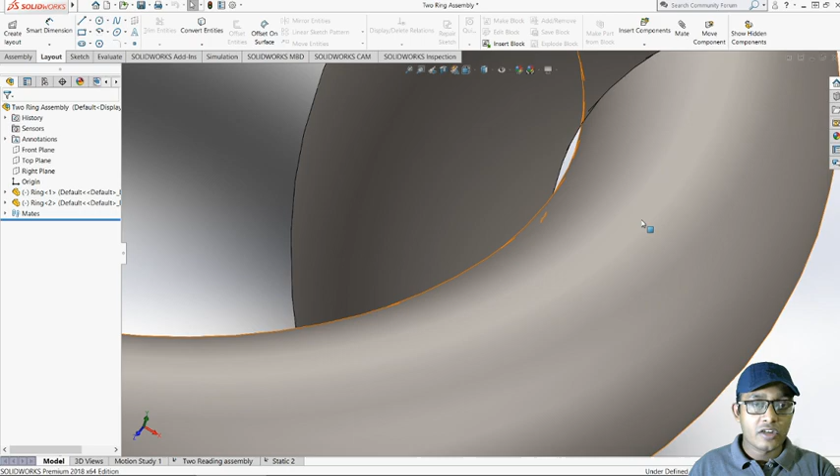Today we're going to learn how we can draw a two ring, and how we can assemble this two ring in this way, meaning inside each other. And the second thing we're going to learn: if we apply the external load on any side, keeping one side in static position, what kind of contact pressures will be generated in the contact places in this two ring. That means here what will be the conditions of the contact pressures in this area. So this will be our learning objectives of today's tutorial.

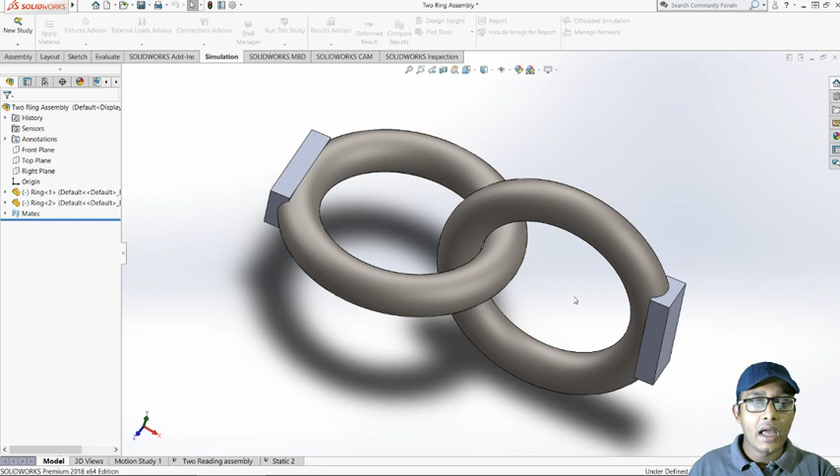So at first we'll learn how to draw this. We'll draw the part drawing first, then we'll assemble this ring, and then we'll run a simulation to demonstrate to you how we can measure the contact pressures in this area when external loading will be applied on any side of this two ring. So without further delay, let's get started.

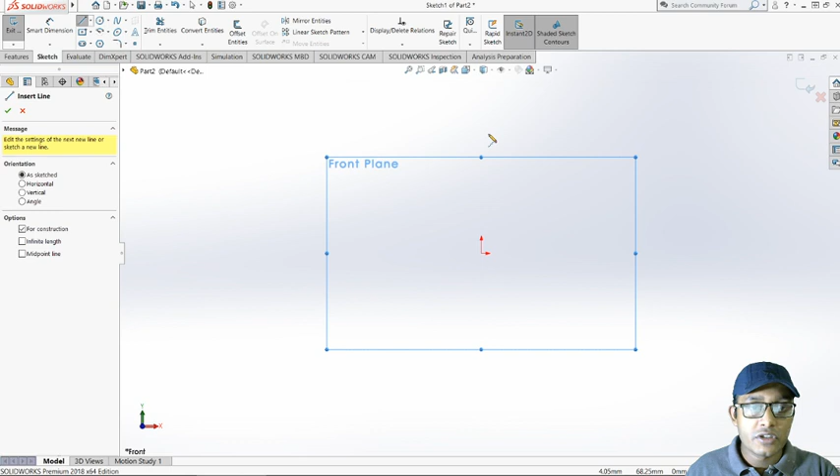So we'll start with the part drawing first. Our first task is to draw a ring. We can start from any of the planes, so let's start with the front plane. There is a couple of ways to draw a ring, but now I'm just showing you one. So I'm drawing a reference line first, then I'm drawing a circle.

Then I'm giving it smart dimensions: let's give this one as 20, and let's give the distance from the center line to here as 50.

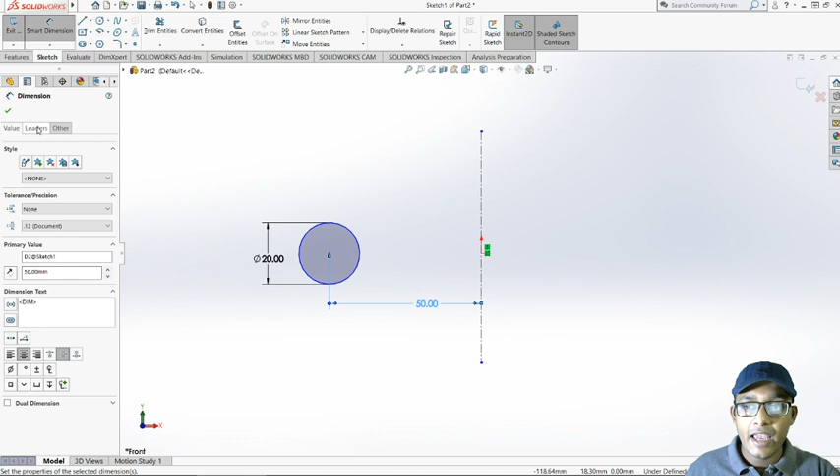Now what we need to do is go to Features and Revolved Boss/Base. If we just select this face, automatically it will take the axis of revolution here. This is our axis of revolution and this is our thing.

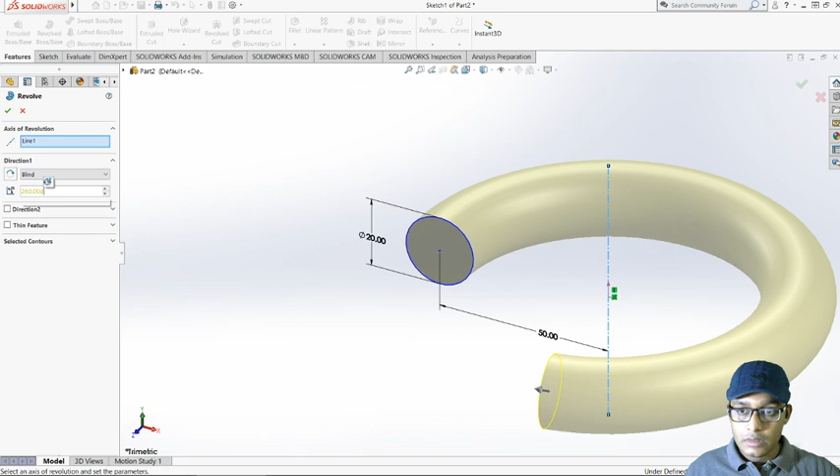So actually here the 360 degree is given, so we can also change the degree to 200 degrees, or we can also increase this one, but to make a ring it must be 360 degrees. So without further delay, let's put 360 degrees.

All right, so now we have a ring, but the problem with this ring is there is no flat surface where we can apply the load, and we cannot put any boundary conditions, because if we select on this ring, the whole ring will be selected. So that's our problem - we need to create a flat surface in this ring.

So let's do it. Let's select this right plane. There's a couple of ways to do it, but let me show you the easiest way. Actually, if you select the right plane, top plane, or front plane - any of these planes - it is exactly in the middle. That means if you draw anything, all the drawing will be on the middle plane. So that will not help us.

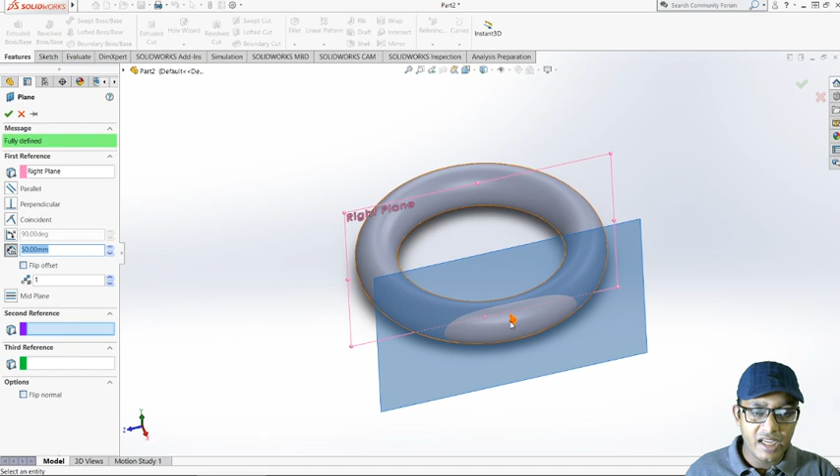It will not help us to remove or add material on the ring, whatever we draw here. So what we need is a reference plane. Let's select the right plane and select reference plane. So if we select a reference plane, you can select either side, and you need to put a distance from here.

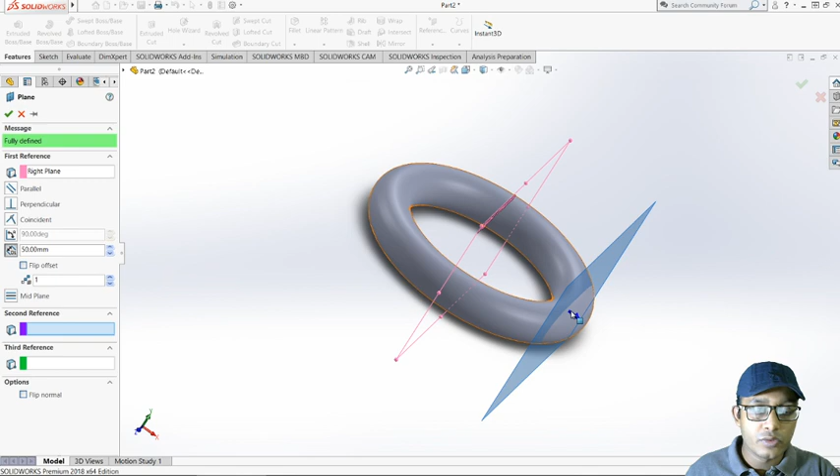You can reduce this to 40 or 30. 30 is not going to help us. 40, yes, somehow it will help us, but 50 is exactly in the middle of the ring, almost - as we selected from the center, the radius was 50, so let's keep this distance as 50. Done - now we have a reference plane here.

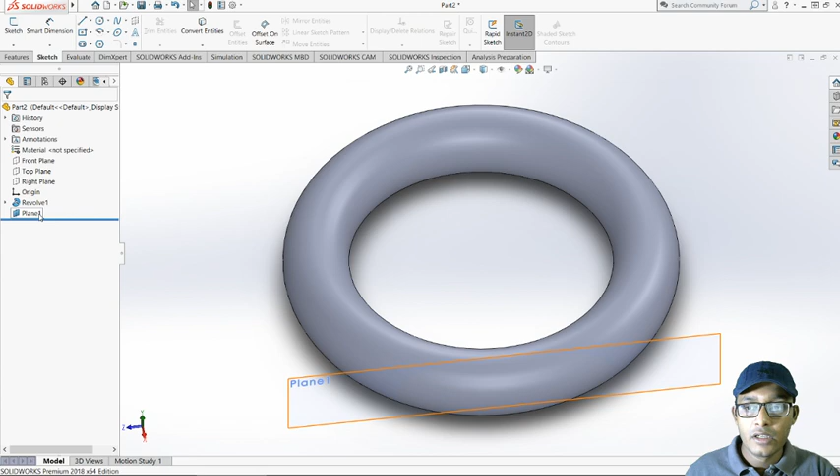Now we have a reference plane. So if we select this plane and draw anything here, it will be inside this, like here - it will be drawn here, right? So that's the thing that we want to do.

So let's select this plane. Now let's draw a center rectangle. Let's draw this, now let's give it dimensions. So let's give this dimension as 20. And this distance of 95 is too much - I think 70 is good enough for us. Let's give this one as 70.

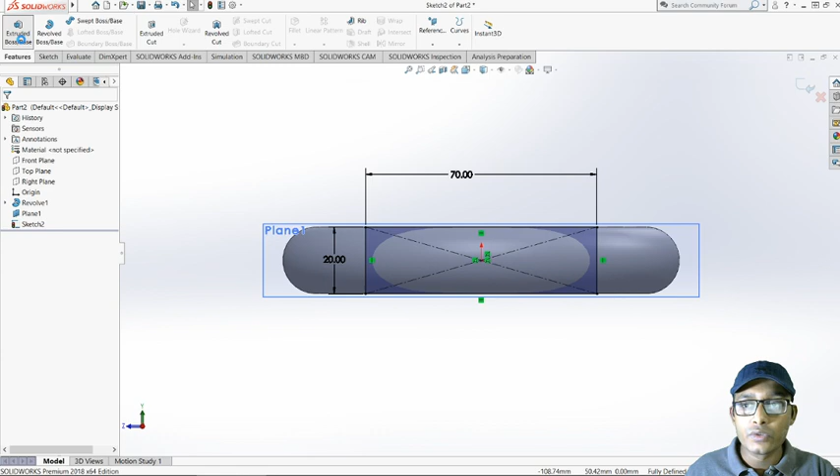So 70. Now if we use the Extrude Boss Base feature, as you can see from 50, if we select like this, giving 10 is good enough for us. If we give 10, we now have a flat face here, and it will help us in many ways in the assembly as well - we can select the face to mate with each other.

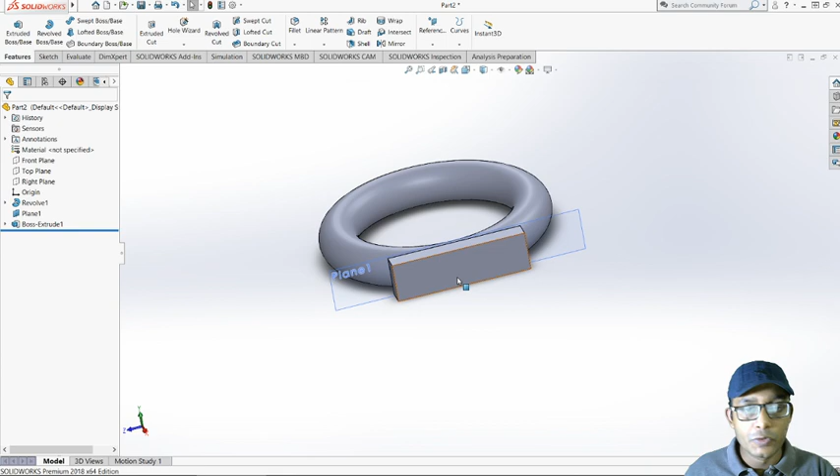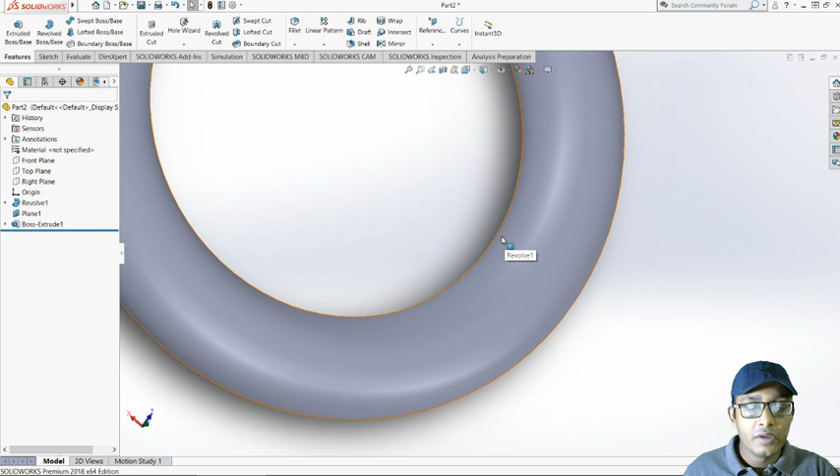So now one portion is done, but to fix the ring inside each other we need one more thing, because we can make the axis parallel with each other using this surface, but how can we mate these portions? Because if there is nothing, the whole ring will be selected.

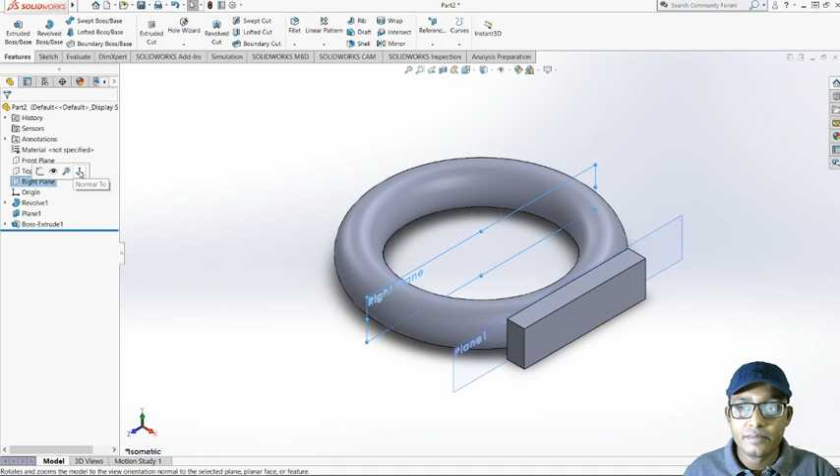So we need to create some point here so that we can select it in the assembly. All right, so for this, let me just show you. Let's select the right plane once again. Here now let's draw a very small circle. Very small. The radius I'm gonna give is 0.5, that is the diameter is 1, right?

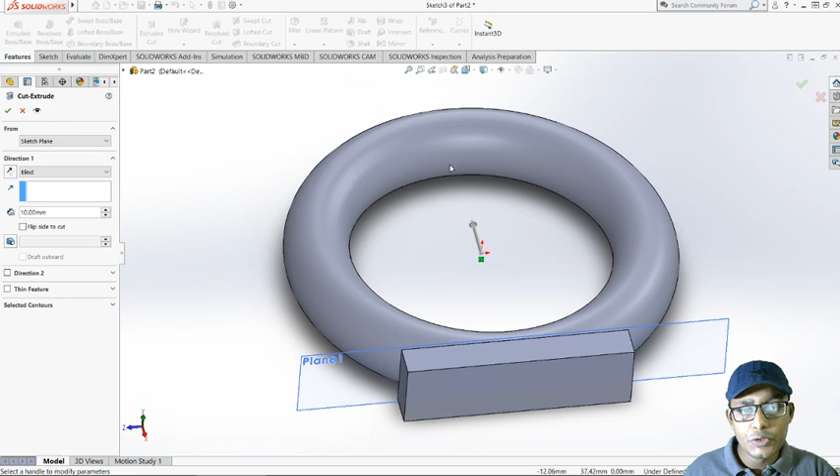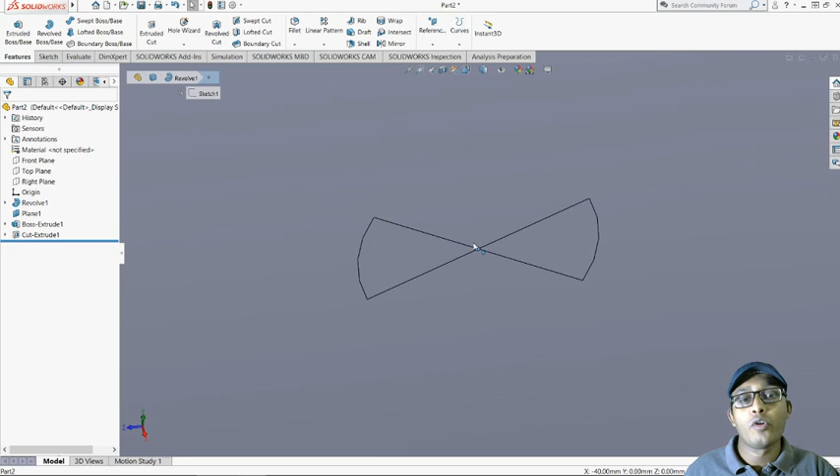So now I will use extrude cut. And if you remember, the distance from here to this surface, that means the inside of the ring, was 50 minus 10, that will give us 40, right? So if we select 40 and make extrude cut, it will just touch the surface, and we are going to get a point here. This point will help us in the assembly sections.

All right, so can you see this point? I think yes you can. Just let me check it's running. Yes, the video is running. All right.

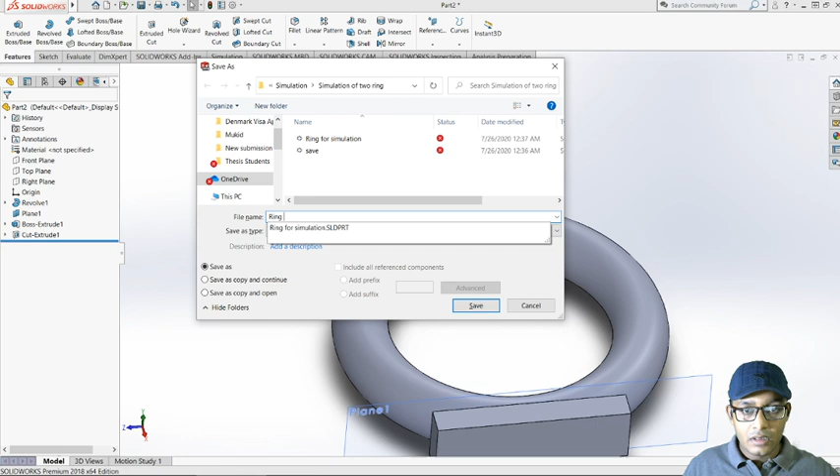So yes, our part drawing is done. So now let's save it. Two ring simulations, ring 1, let's give this name. Now our part drawing is done. Now let's go to the assembly sections. So let's select assembly. We have just drawn this, ring 1. We need actually another ring, right? So let's select another ring.

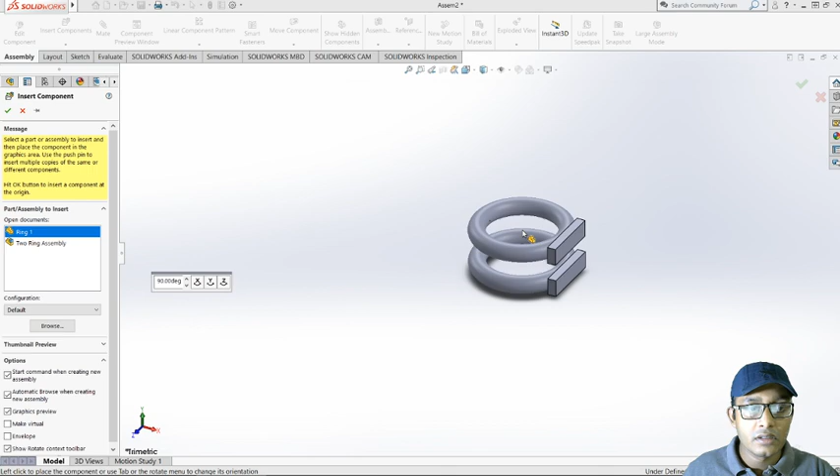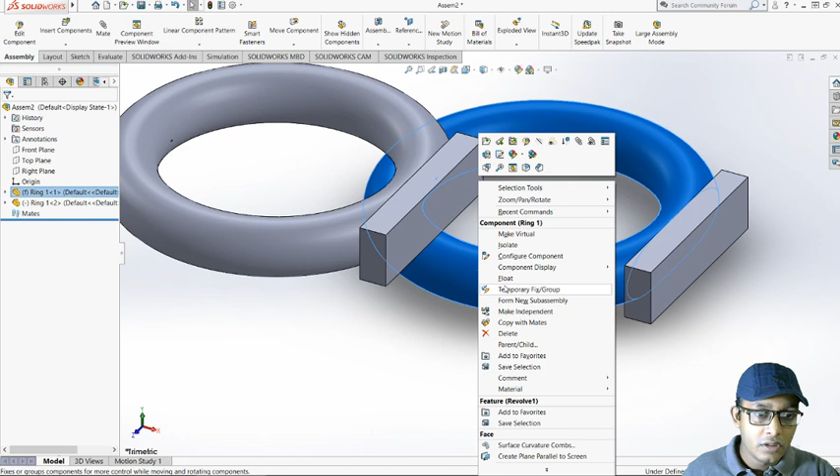So now what do we want here? We want to insert these rings inside each other, right? You can move this one. To make float you can move both of them by using floating options, or you can fix this one. So let's make this fixed, now this is float. Which one is floating and which one is fixed, you can identify here. This F means fixed, and this minus means you can move this one around.

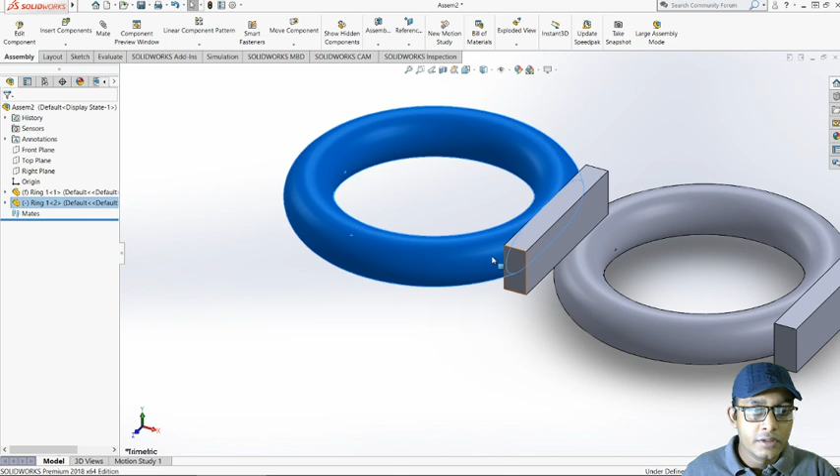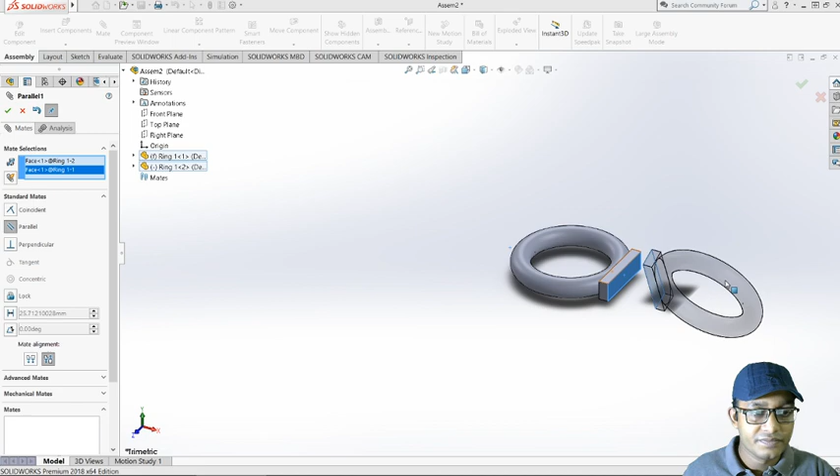So what we'll be doing first, let me show you. We'll mate the faces, right? So let's select this face and this face. Let's select parallel, but as you can see, we will select it this way, parallel but in the opposite way. So if you select it, now we can move this one in this way. Also we can select this face and this face as parallel.

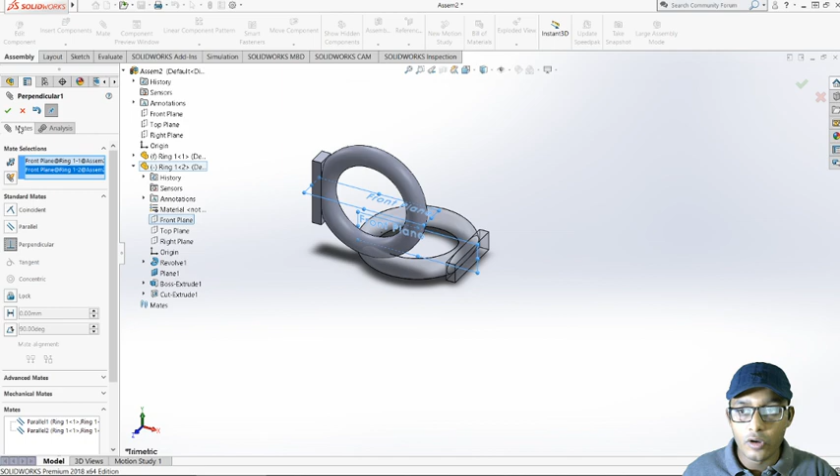Now, there is another way to do it as well. We can select this front plane for the fixed ring, and also select this front plane, and select perpendicular to each other, which will also serve our purpose. Yes, now it's fully defined.

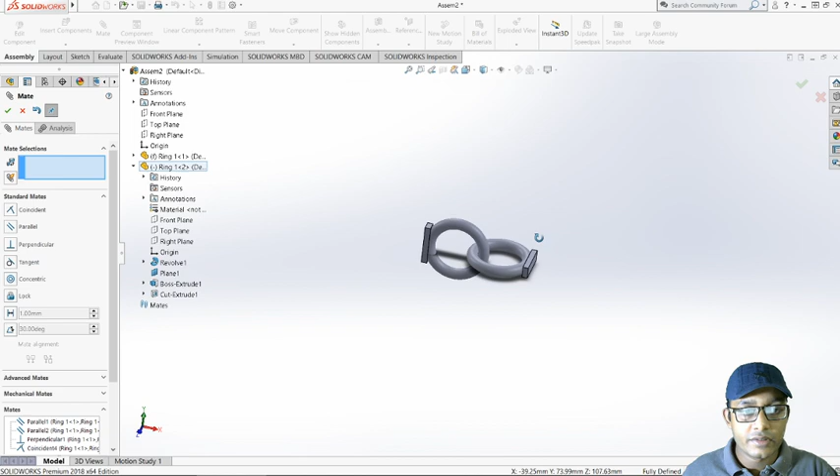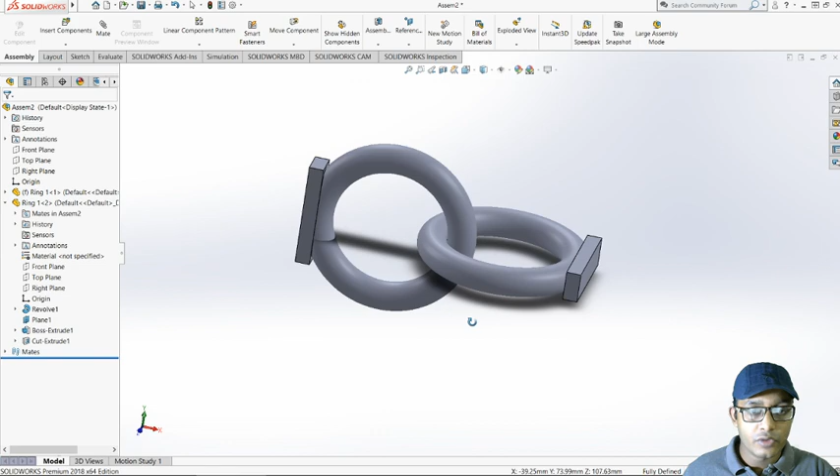Now we'll select this point here, and we'll also select this point here. Now coincident. If you do this, our task is done. Yes, now it's fully defined. As you can see, now we have a two ring assembly, inside each other, and we are ready for our next step, that is the simulations. I don't think it's very difficult, it's easy to perform. So if you understand from here, now we are ready to move to the next section.

If you don't have simulations in this ribbon, you can click on the SolidWorks add-in. Then here you will find SolidWorks Simulation. If you click here, then simulation will come here. So after simulations, select new study, ring assembly. Let's give this name: contact pressures of two ring.

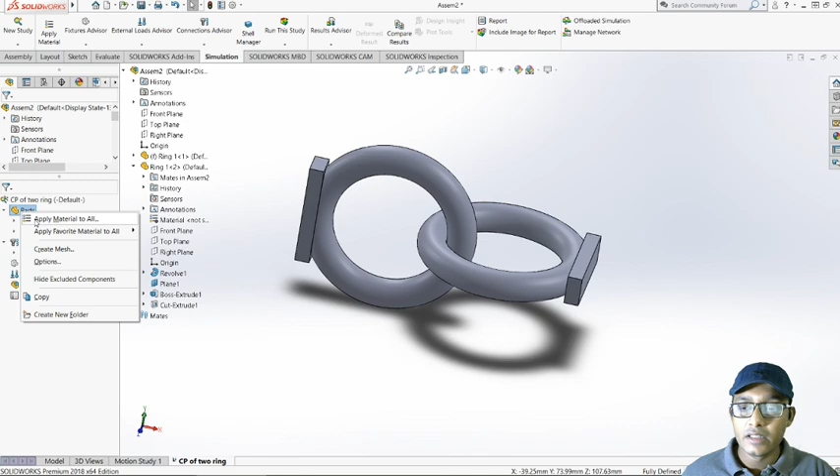The first task is to define the material property, what material you are going to use. You can give different kinds of material for different parts, but as we are using the same material in the two rings, we can right click here, then click on apply material to all. Then we can select AISI 1010 steel, hot rolled bar. If we now apply, you will see that AISI 1010 steel hot rolled bar is selected for both, and the color is also changed accordingly. So this is our first task.

Now the second task: after doing this, you see connections. In the connections, if you click here, you will see global contact bonded. It's bonded by default, but it's not bonded actually. You need to select the contact type, no penetration.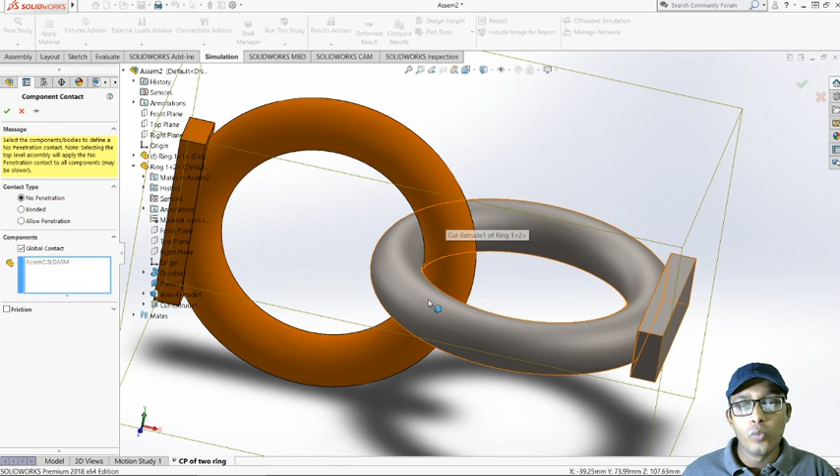All right, so why no penetrations? Our expectation is when the load will be applied here, this ring, as it's made of steel, is definitely not going to penetrate inside each other. It's not bonded as well, and we don't want to allow penetrations here.

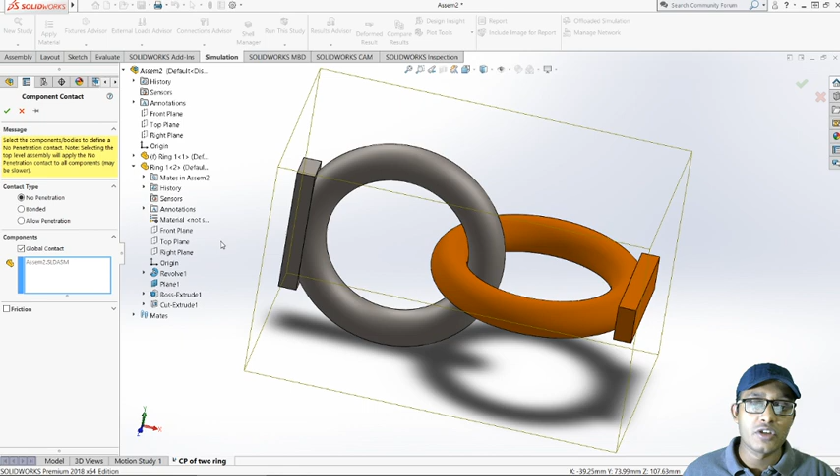Where can you use bonded? In composite material, where one layer is attached to another layer with some kind of chemical adhesion. At that time you need to use bonded. And when can you allow penetrations? If you are working with rubber type materials where some sort of penetration or shock absorption is allowed, at that time you can allow penetrations. All right, so we have selected no penetration for our simulations.

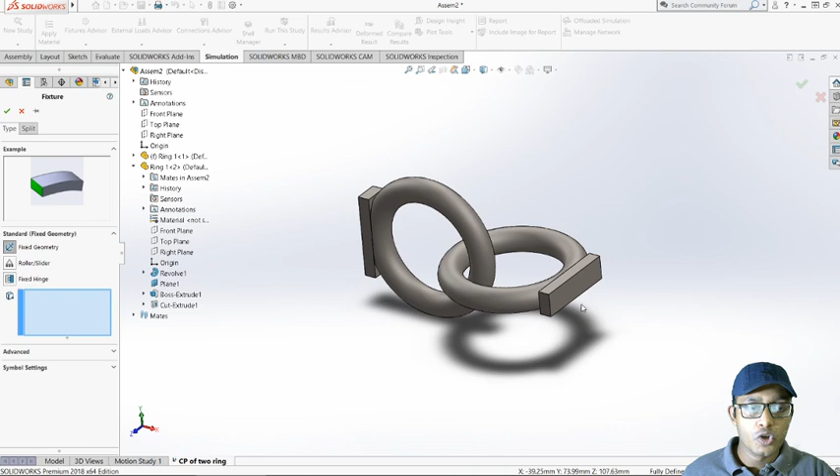Now we have to select fixtures. In the fixtures, you need to select the fixed geometry. When you apply the force, the other end definitely needs to be fixed, so that's why fixed geometry is important. For fixed geometry, let's select this face.

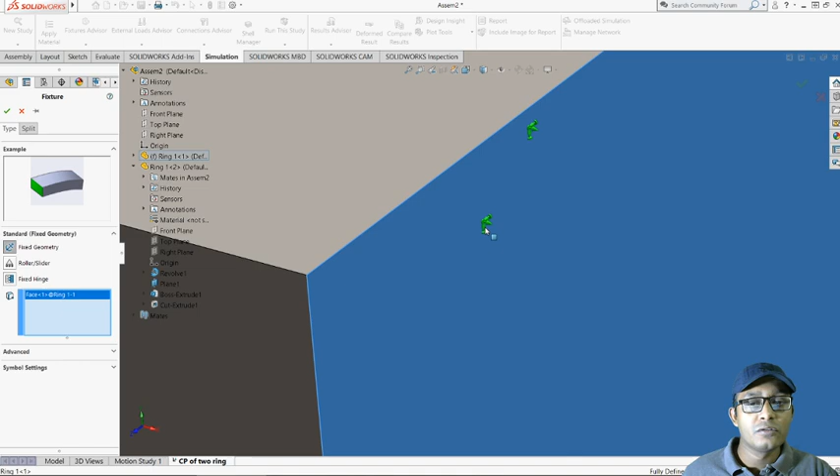If you select some face, this kind of three direction arrowhead will be applied. What does it mean? This green arrowhead is showing the XYZ directions. If it is green, there will be no displacement in these three directions, and it is completely fixed. Remember this one. This is our fixed geometry.

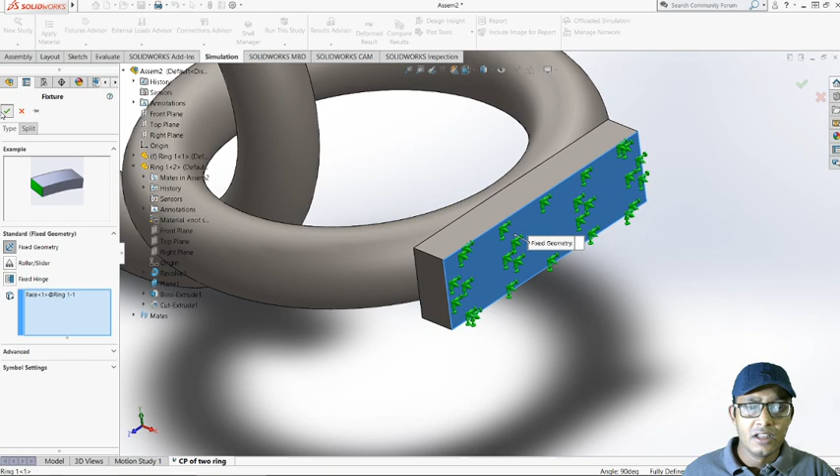So you can select this face as our fixed geometry. I think you can select all the faces actually, but it will not make any difference, because if this face is fixed, the other face is automatically fixed as well. So we have selected this face as our fixed geometry, and we'll be applying load here, in this face. Now there are a couple more boundary conditions we need to give.

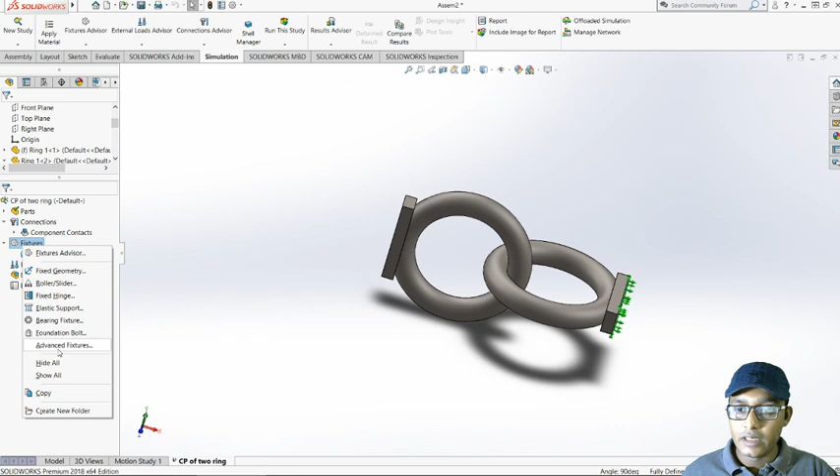For that we need to right click on the fixtures, then advanced fixtures. In the advanced fixtures, we need to select this face where we'll be applying the load, and which direction it will translate, meaning move. It is in this direction, front. When we apply the force, it will move this way. So now we need to restrict the movement in the other two directions.

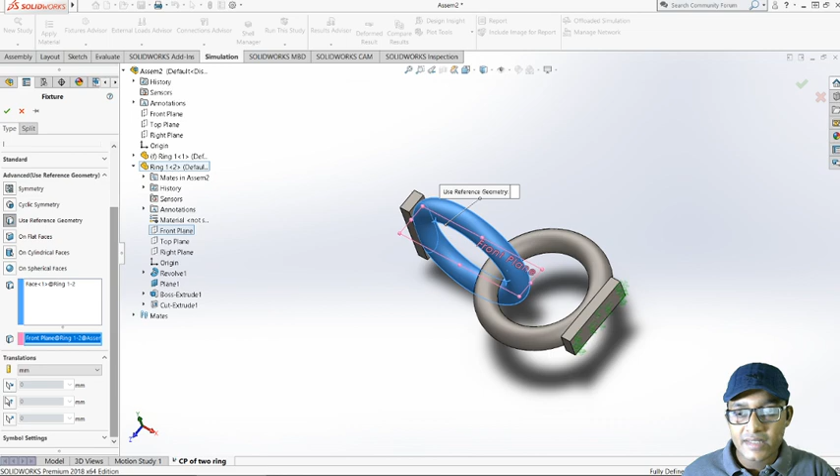How can we do this? If we select here, you will see there is an arrowhead. We want the displacement in this direction to be 0. In this direction, as you see from the arrowhead, we don't want any kind of movement.

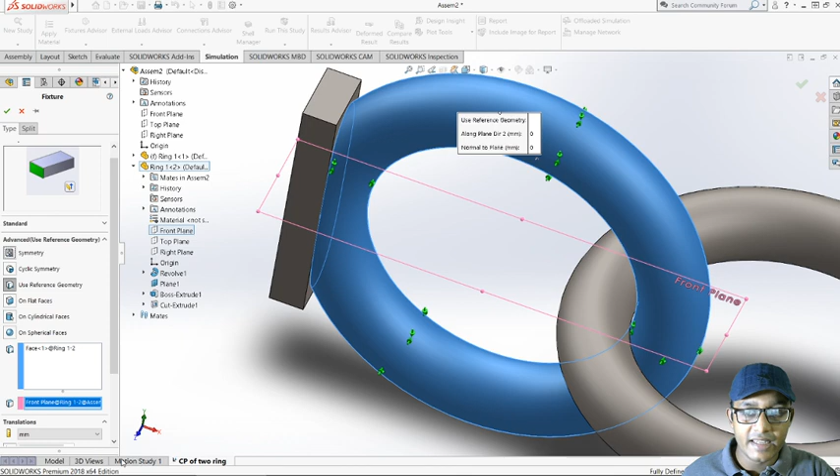Now again let's select here. Yes, it is again in these directions. This is X, this is Y, this is Z. So in the Y and Z directions, as you can see here, I have restricted the movement. The value is 0. I just want displacement in the X direction, so keep X this way. All right, so we are done up to here.

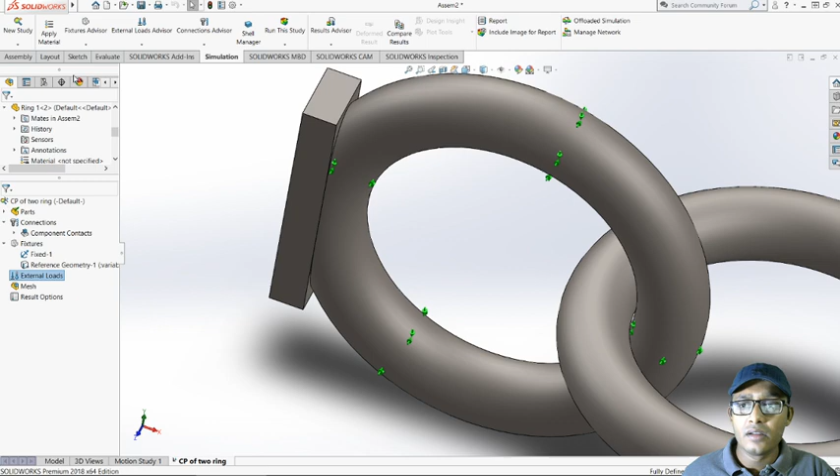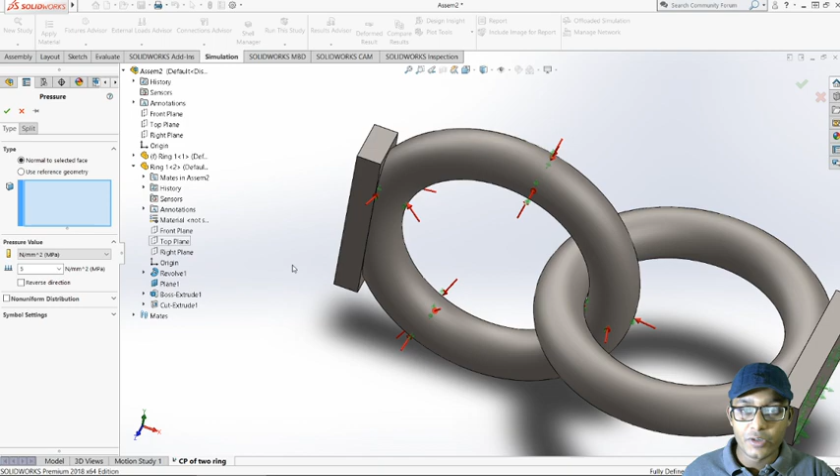Now let's give an external load in terms of pressure. We'll be applying pressure loading in Newton per meter square, megapascal. Let's select this one, Newton per meter square, megapascals. Let's give a load of 5 megapascal. But where do we need to give the 5 megapascal?

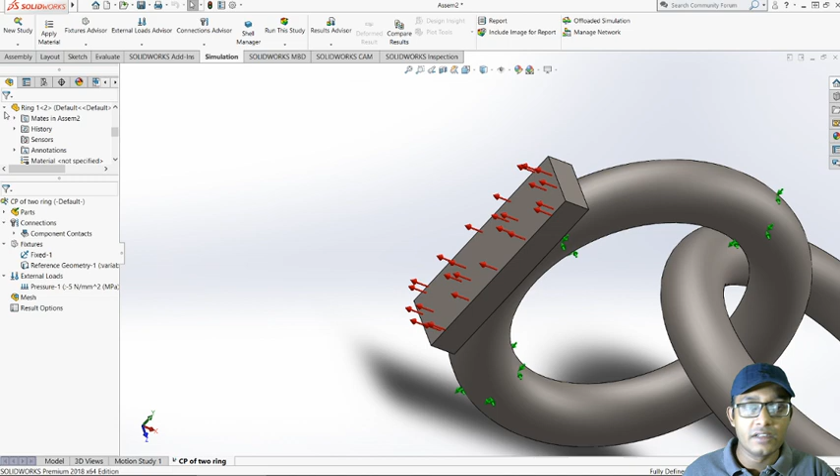Here in this face, right? But you can see the arrowhead points this way. If we give a load this way, it's not going to help us. So you can select reverse direction so that the force is applied in the right direction. Done. So we are done with the necessary conditions. Our next step is to create the mesh.

Actually, creating the mesh is a very important step of simulations. Now I will be showing some tips and tricks to do a fine mesh. The finer your mesh is, the more time it's going to take. If your mesh is coarse, meaning a bigger size, then it's going to take less time to finish the simulations. So let's select apply mesh control.

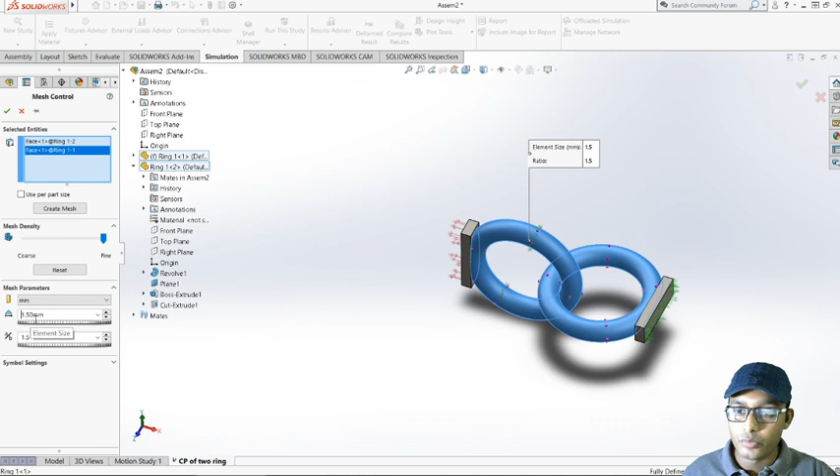Now let's select this face and this face. In this area, I want very fine mesh. If I want fine mesh like this, you can also put your own value. If I put 1.5, I can set the minimum mesh parameter to 1.5 millimeters. And I can select here this way. Now I need to go to the create mesh portion.

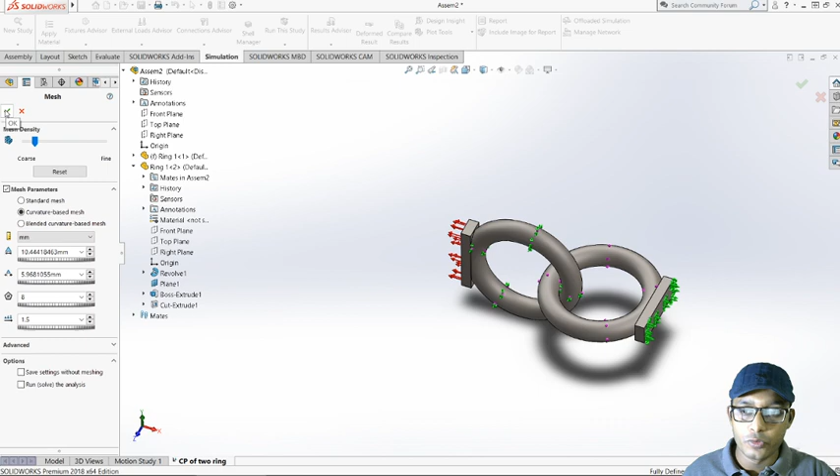Now there is standard mesh and there is curvature based mesh. This is a curvature based mesh, and we need to select curvature based mesh. If we select curvature based mesh and I select coarse, let me show you what will happen. And then if I select like this, let me just show you what will happen.

Yes, it's done. As you can see, as we have selected curvature based mesh in these two rings, that's why you can see that in this curvature the mesh is very fine, but in this area the mesh size is coarse, that means a bigger size.

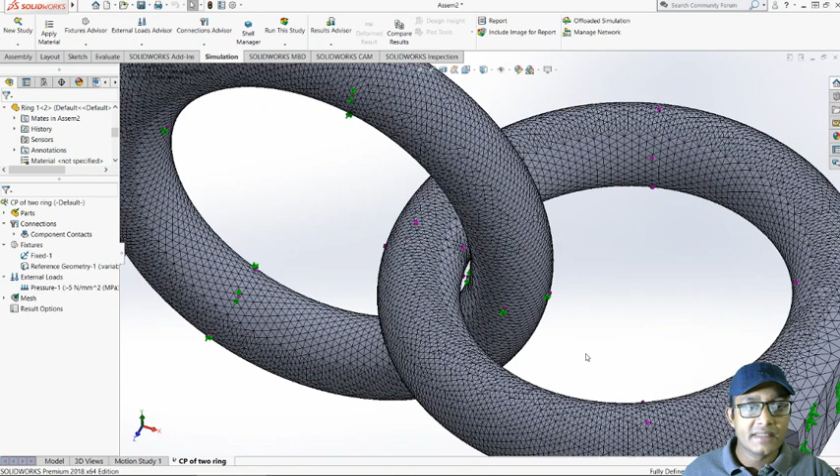Okay, so because our interest is in this area, you can draw it in such a way that we can make partitions here, and we can select this face and this face, and we can put these two areas as a very fine mesh and other areas as coarse mesh, which will help us effectively reduce the computational time.

All right, so we are almost done with the necessary arrangement for the simulations. Now what we need to do is run the study. Let's click run this study. It's going to take some time, as you know, we have given a very fine mesh, so it's going to take some time. So let the simulation complete.

Actually, I think we need to wait for a lot of time. So let me cancel this solver, because it's going to take some time. So let me just show you some other way to create the mesh. Here we can select not fine, coarse mesh. Okay, let me select this one, and let me show you mesh progress.

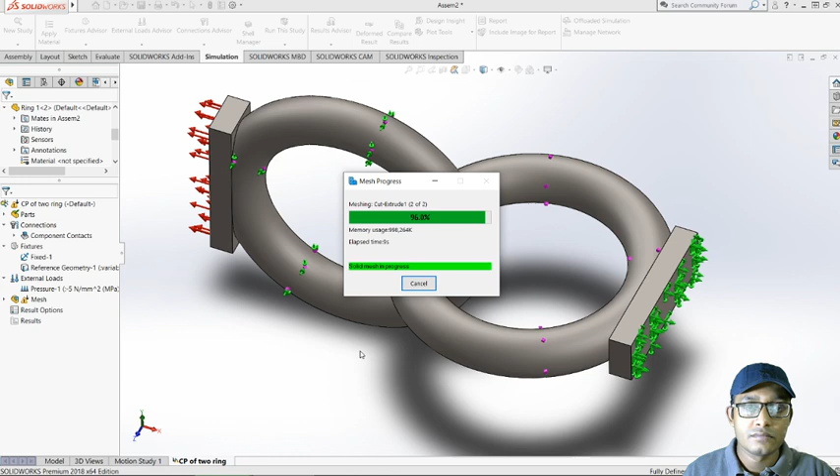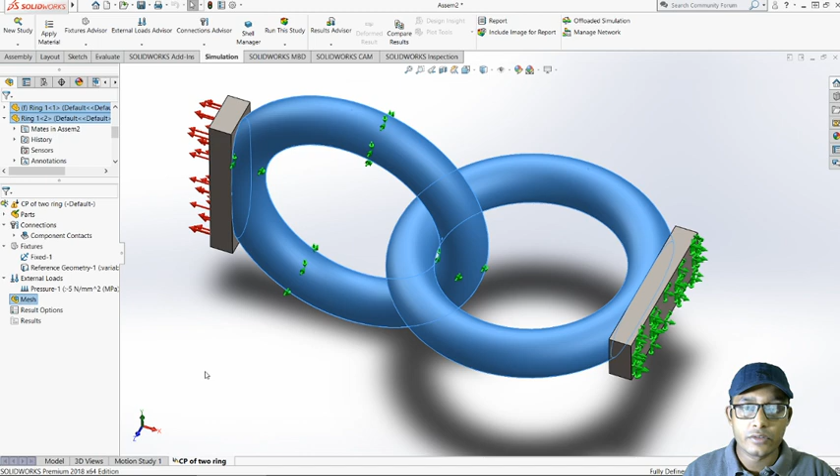I think something is wrong with the control. Let me delete this. Actually, it's already saved. Let me delete this one as well. Okay, let's do it once again. Let me show you. So here, apply mesh control. Let's select this face and this face. Let's select coarse a little bit.

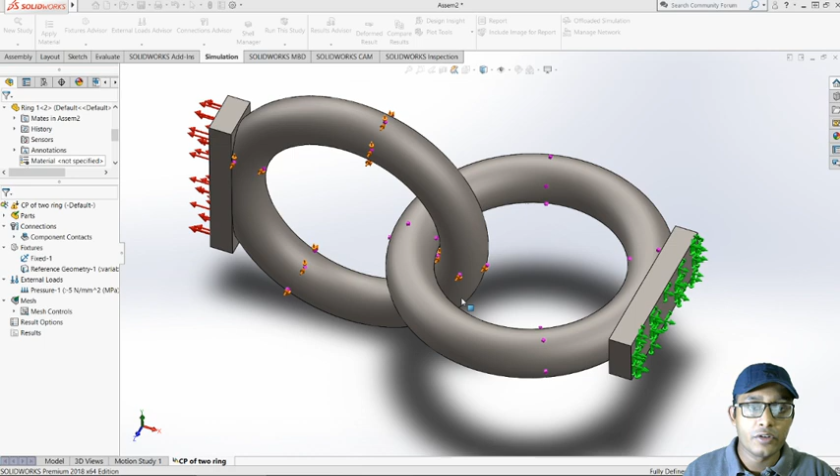Okay, and then let's go again to, sorry, not apply mesh control, create mesh. Curvature based mesh is selected already. Now select this. Now it will be very quick. Yes, as you can see. So the reason I did this is because it's going to take much less simulation time, computational time. You see it's solving very quickly.

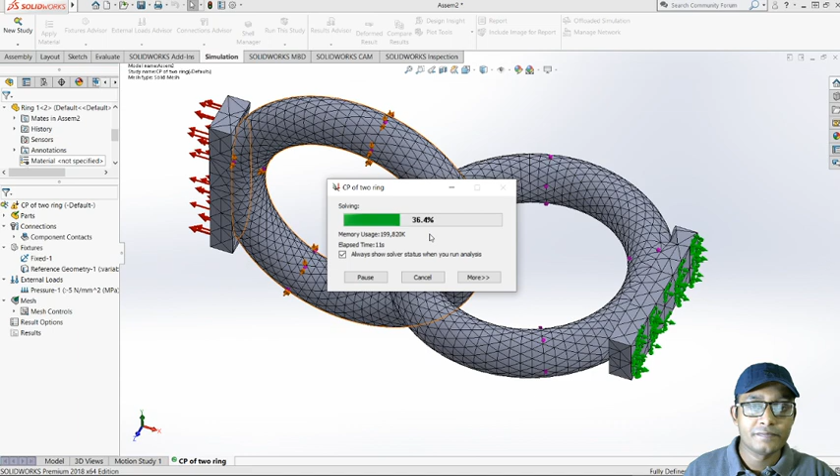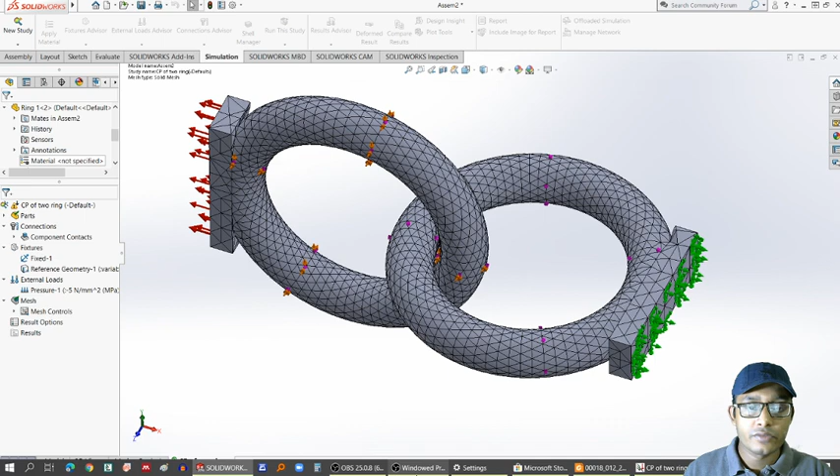If you need very perfect results, definitely you need to use a fine mesh. As this is the tutorial, I've selected this one. Let's wait for a couple of minutes. Yes, the simulation is done. Now we are ready with our results.

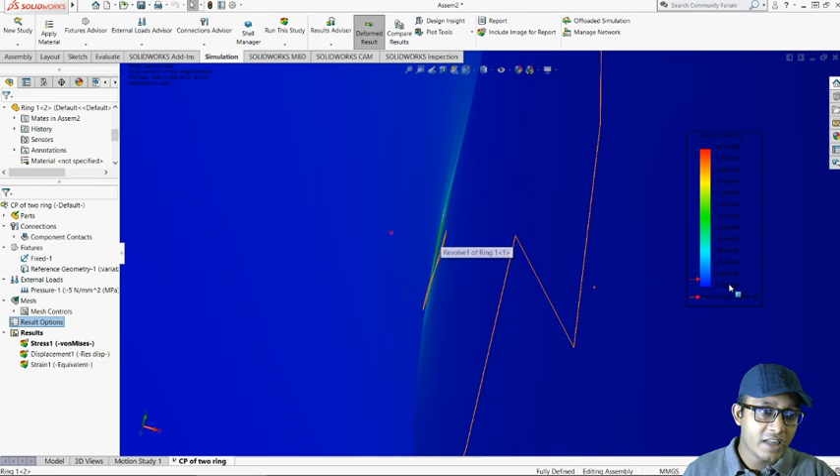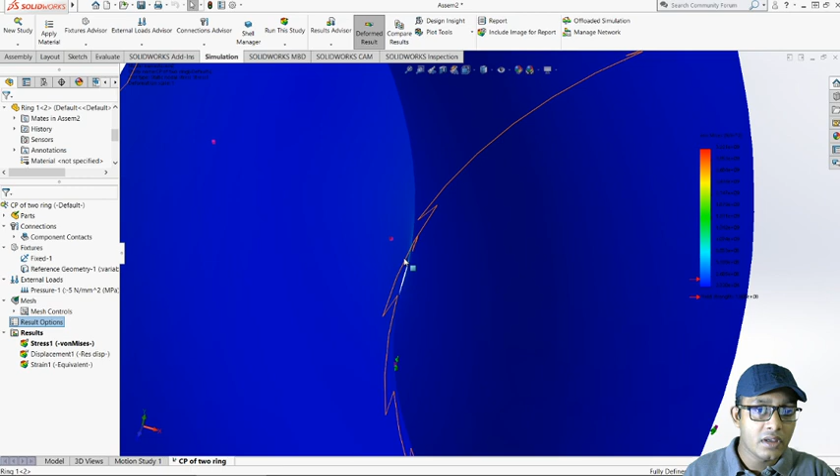We can see the stress is developed in this area. That's why the color is changed here. The blue color means there is no pressure at all in these areas. And the color showing here is the green color. That means it is within the range. If you observe a color like this, that means it's in the danger zone, and we need to modify the design to bring the pressures within the green or blue range.

All right, so now this is our von Mises stress, and if you click here, then you will be able to see the displacement here. The displacement is in millimeters, I think 1.1 10 to the power minus 1. That means the maximum displacement here is 0.1 millimeter after applying this load, which is very less.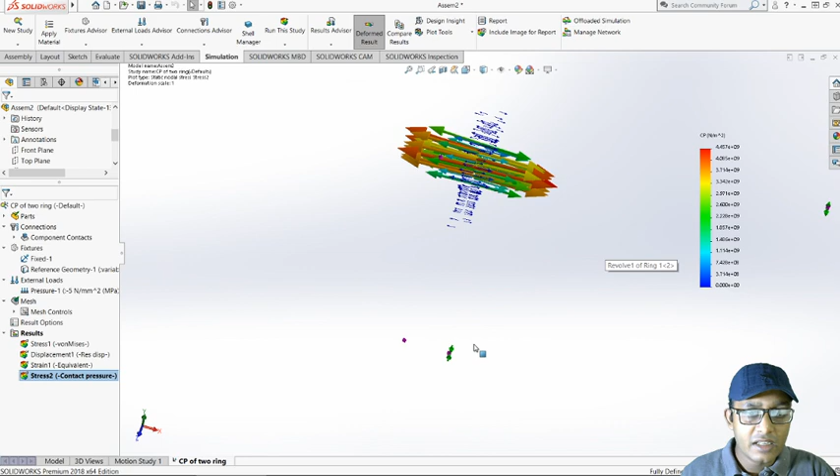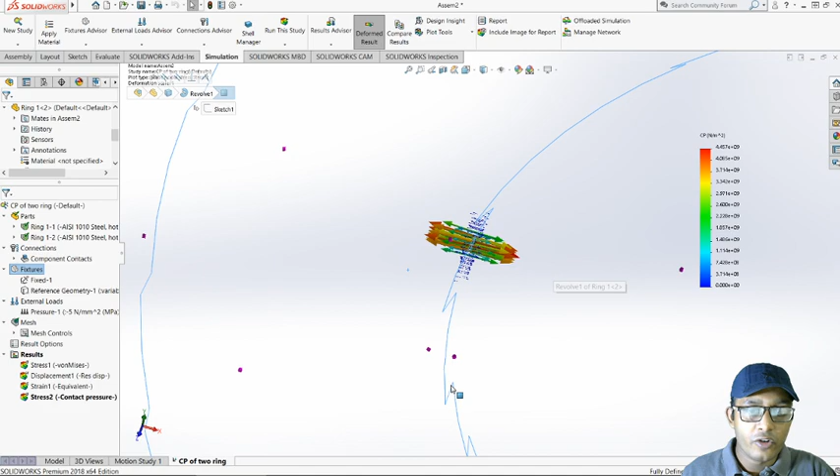Now if we select the contact pressures, then you will be able to see the contact pressures acting in this place. There are some additional arrows here; we can remove those. If you select here external loads, hide all, then the other arrowheads will be removed. So now here we can see the contact pressure that is acting in this place.

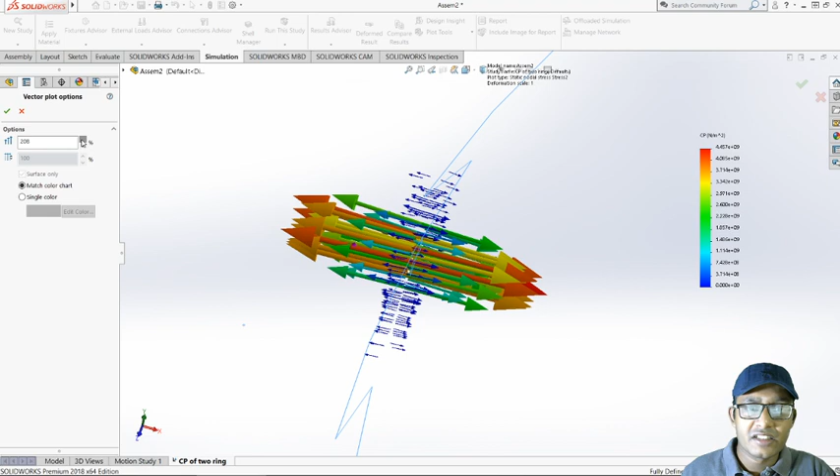Also you can change the size of the arrowhead by clicking here, the vector plot, then if you select this arrowhead, you can change the size. So this is how we measure the contact pressure in this two-ring assembly. If you change the external loading, all the values will be changed accordingly.

Okay, so this is all about today's tutorial. I think you have understood this whole tutorial.